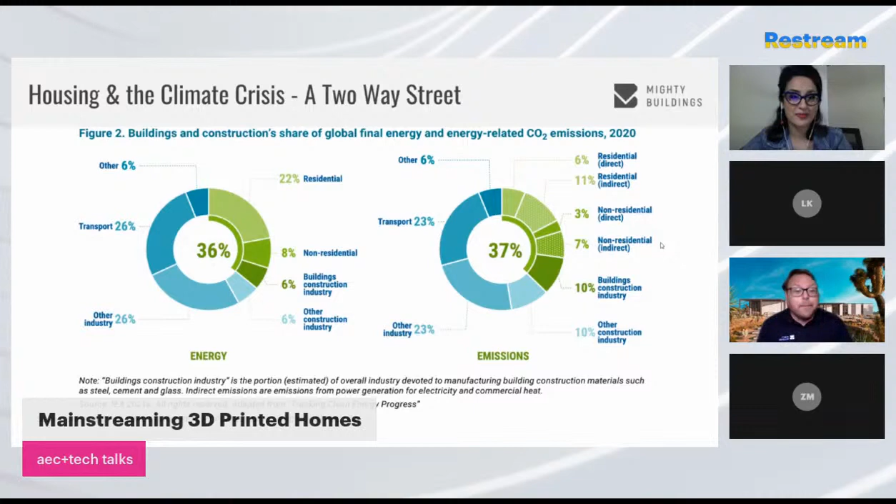3D printing offers new possibilities in changing how we build by bringing in new materials, new technologies, and by inherently being a zero waste production process. So we're starting to see a rise of it across the world.

We've had ICON building developments in Texas and Mexico for low-income housing. Apis Cor has done some office buildings in Dubai. We've got SQ4D listing a home on Zillow. We've got Branch Technologies doing really interesting work with non-concrete 3D printing for insulated facades and other work. And then the great work that Alquist and Black Buffalo have been doing with Habitat for Humanity to really unlock productivity and bring affordability into it.

So there's a lot of opportunities, but at the same time this is also the building sector, and it's a heavily regulated marketplace. So it's really important that new standards are brought into play, because all too often building codes are sadly written in blood, and they don't actually get modified and updated until something has gone wrong.

As part of this, we've been working closely with UL, Underwriters Laboratories, to develop UL 3401, the world's first standard for 3D printing construction, which has been added as an adoptable appendix to the International Residential Code. Additionally, the International Code Council, ICC, developed acceptance criteria 509, originally in partnership with Contour Crafting, but more recently updated for multi-story printing in partnership with Black Buffalo. That one's really focused on concrete 3D printing.

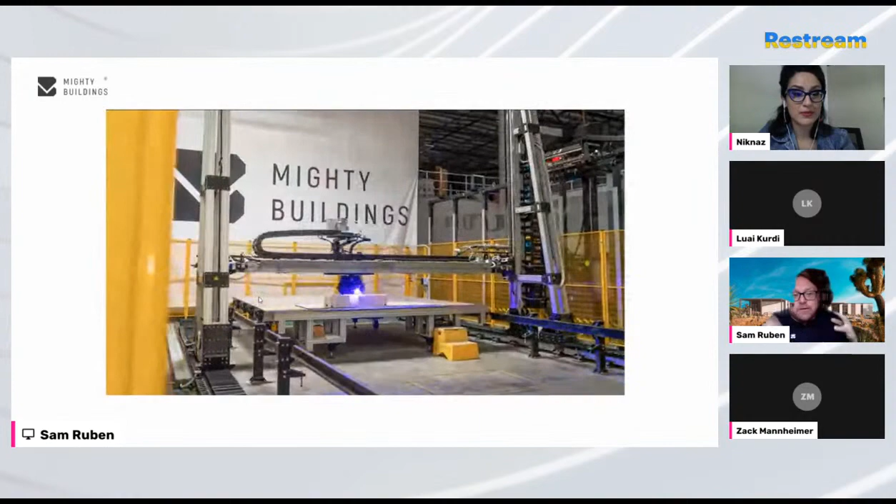So what you're seeing here is the Mighty Buildings printing system, which, as you can see, we are able to deposit the material like a standard extrusion method, but then hit it with UV light as it's coming out, which triggers the curing process instantaneously.

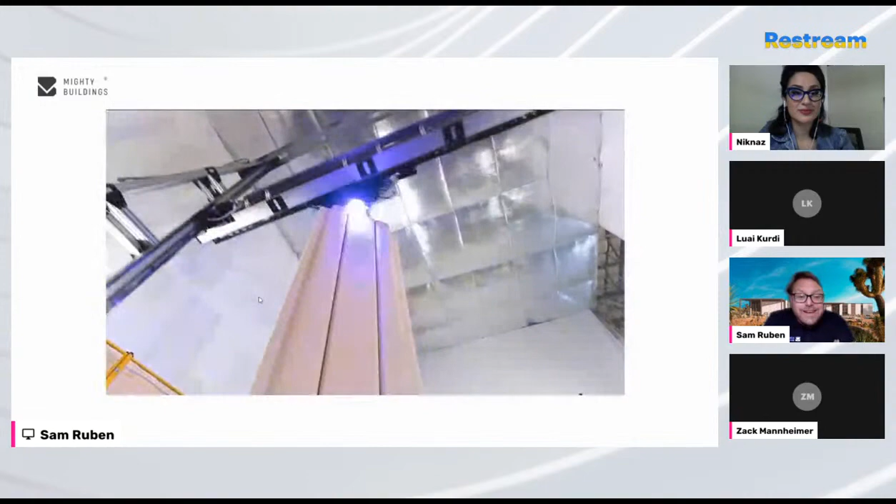And as I mentioned, we have the ability to deposit fiberglass reinforcement into the print layers as we're printing, which makes it incredibly strong and allows us to create unique shapes and forms just by changing the file.

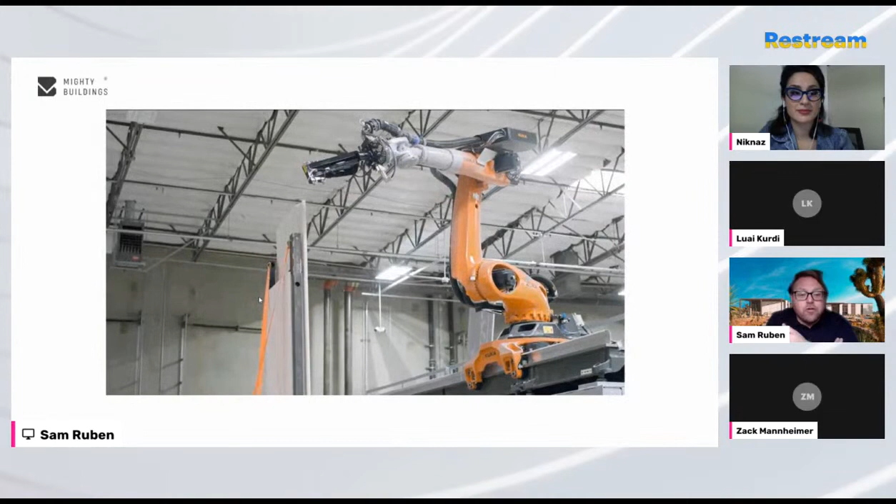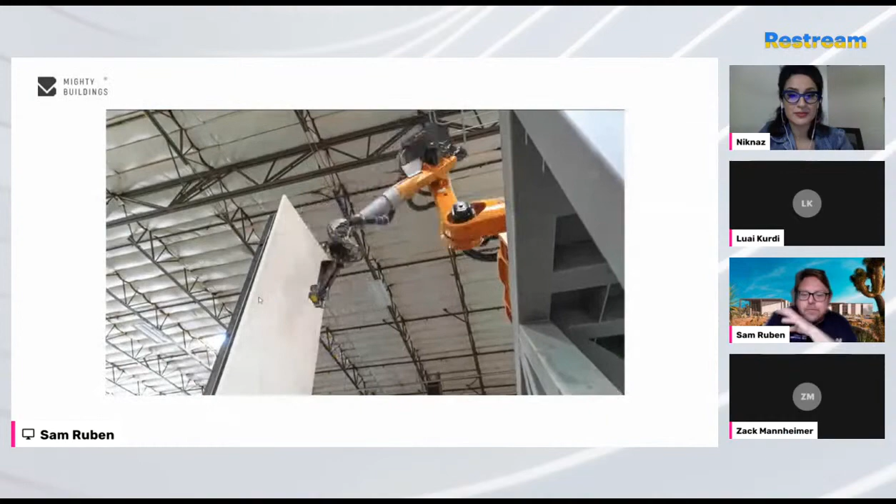And once it's done printing, it then goes to our post-processing cell, where we're able to scan it with laser scanners to ensure it matches the digital file it's based off of, but then also to create a digital model of the physical object itself to allow us to mill it with tools, because even though our material is really strong, it's still soft enough that it can be milled using CNC heads normally used for wood.

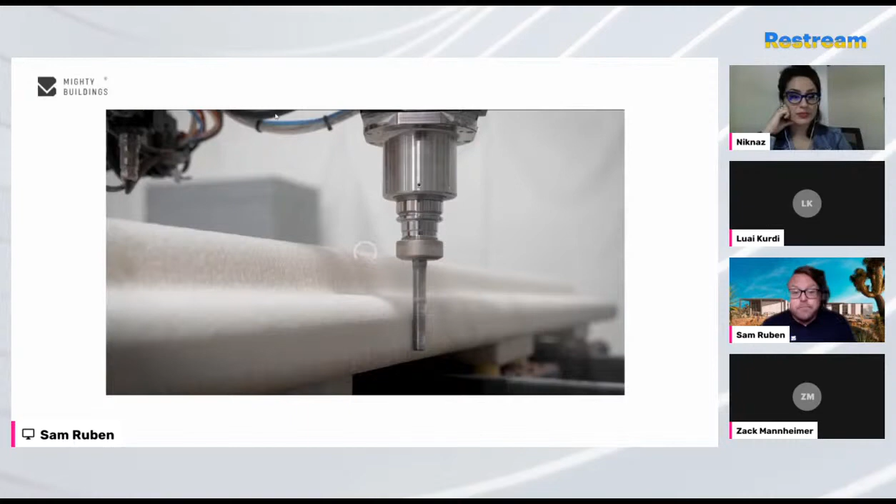So what this means is that it allows us to leverage that to create exact tolerances for on-site assembly, as well as allowing us to introduce new shapes and forms on the surface. So we can leave it with the raw print, or we can mill it to a smooth stone-like finish. And we haven't done this yet, but there's no reason we couldn't leverage that to make it look like brickwork or siding.

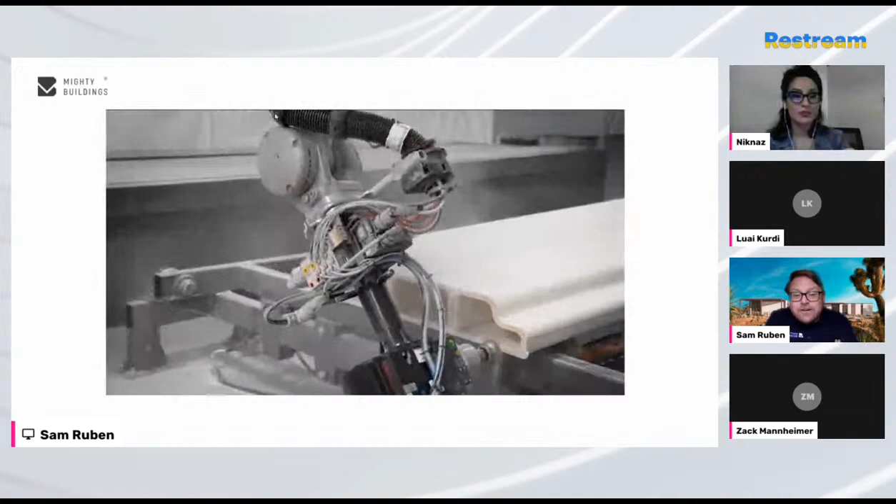Additionally, we have developed the ability to automate the pouring of foam insulation into the interior of each cavity, and that adds to the energy efficiency, which allows us to deploy zero net energy homes. We're also developing the ability to automate spray coatings, so paints, primers, stuccos, that further add to the aesthetic versatility of our production process.

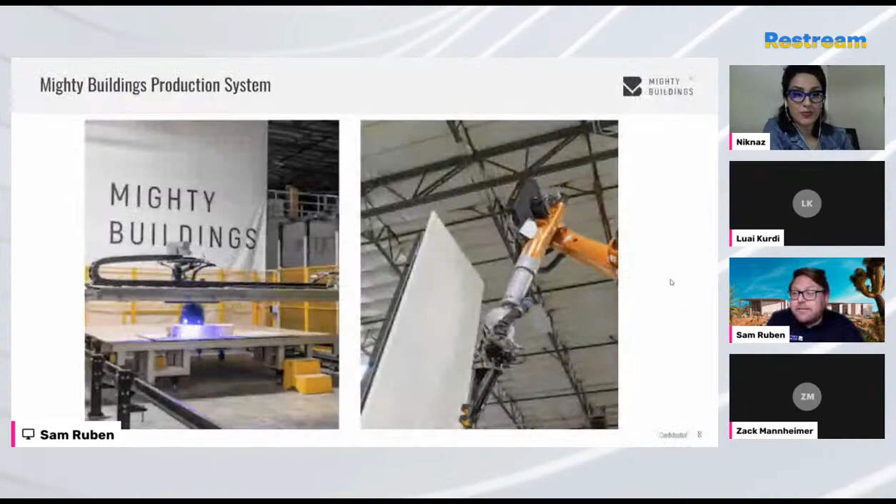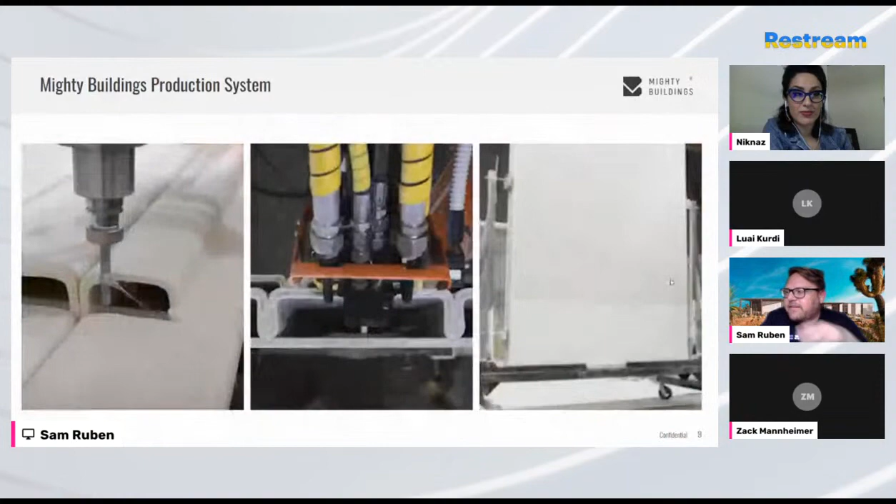And so, in case the video was a little choppy there, these give you a sense of the printing and the scanning that we're able to do. And then this gives you a sense of the actual pouring of it.

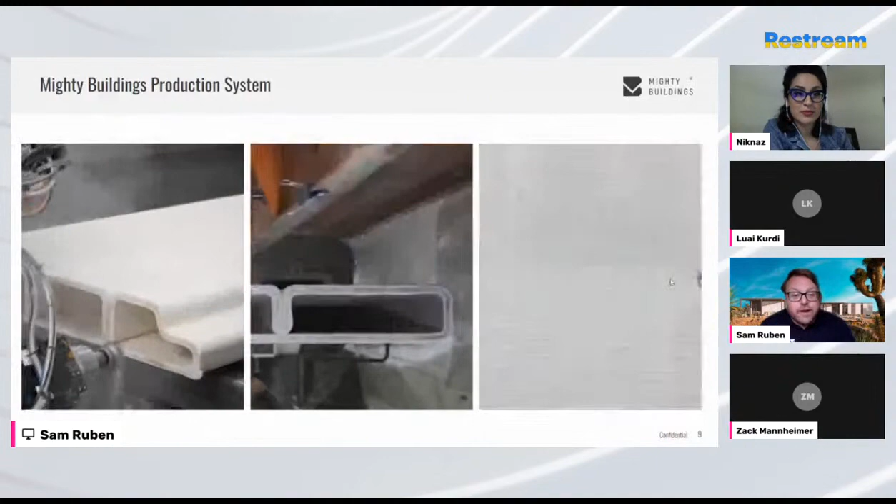One of the things that's really cool is that normally when you're using a high density spray foam like this, you have to have a press in order to ensure that the material doesn't break from the internal pressure. Because of the strength of our material, we don't need to. We're actually able to inject that foam and allow it to expand without any issues. So that's one of the things that we're really, really excited about.

Additionally, with the fiber reinforcement, we're able to fully impregnate it, so it becomes a continuous part of the material. And because it's a continuous fiber, it adds significant tensile and flexural strength, which is particularly important for markets like California, which are faced with lots of seismic activity.

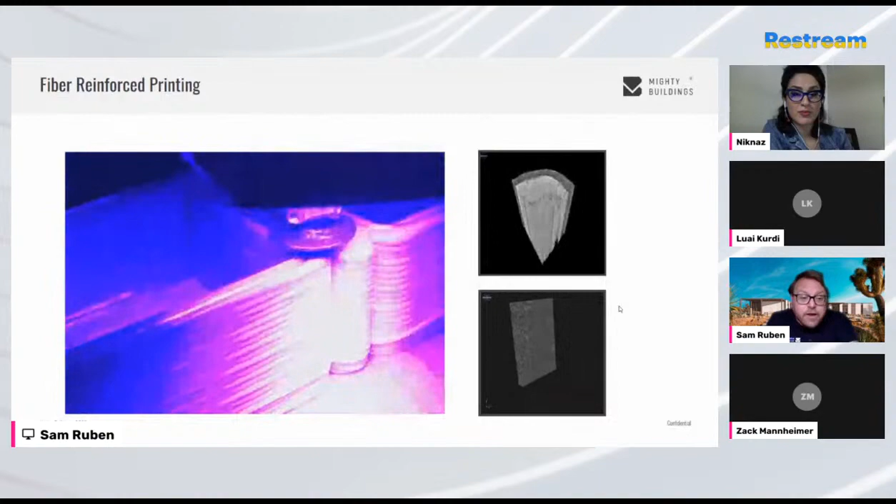It also is important for markets that we're moving into, such as the Caribbean and Florida, where we need to be able to address significant wind speeds, up to 190 miles per hour or more, in order to be resilient in the face of hurricanes and other significant severe weather that we're seeing more and more of.

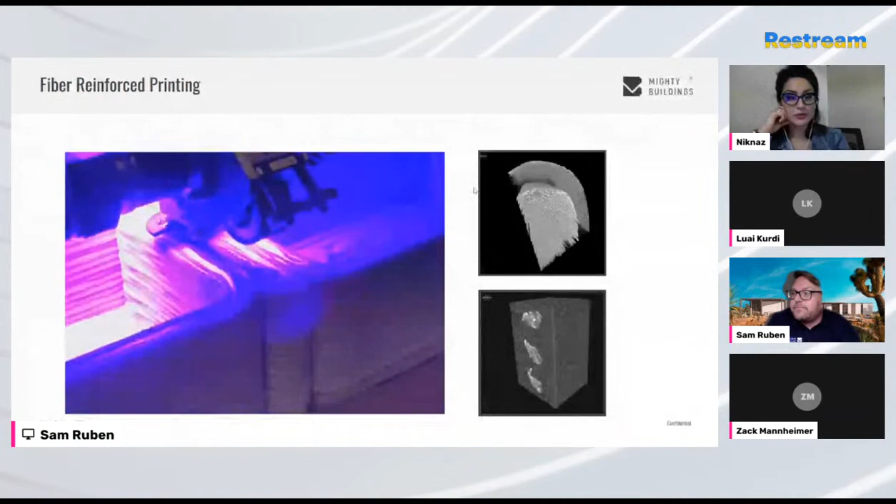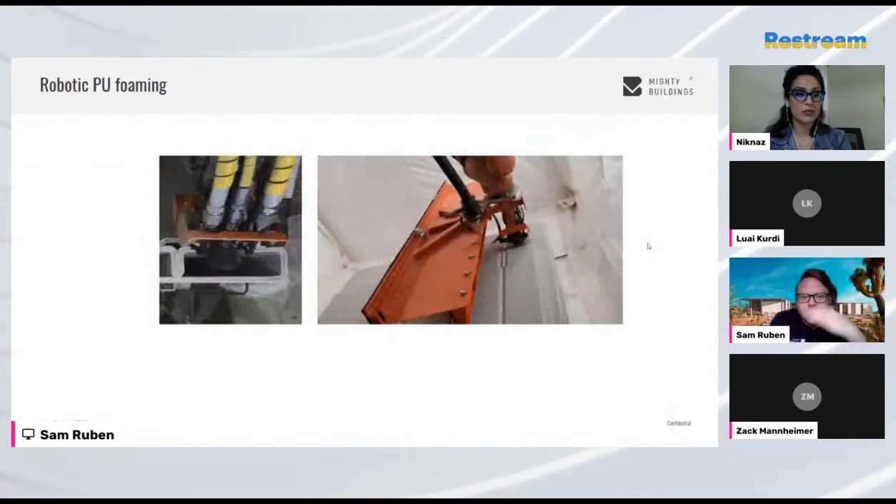Also, we're able to optimize the structural capacity and are working on moving from the single-story homes that we've been deploying into multi-story single family, as well as multifamily townhouses and eventually low-rise apartment buildings. So really looking to expand the typologies possible with 3D printing in order to meet the needs of various communities, and to do both new developments as well as opportunities for suburban and urban infill.

And so in terms of sustainability, one of the things that we've done is that we've committed to being carbon neutral by 2028 without the use of purchasing offsets. And so that's something we're actively moving towards as we move down our roadmap.

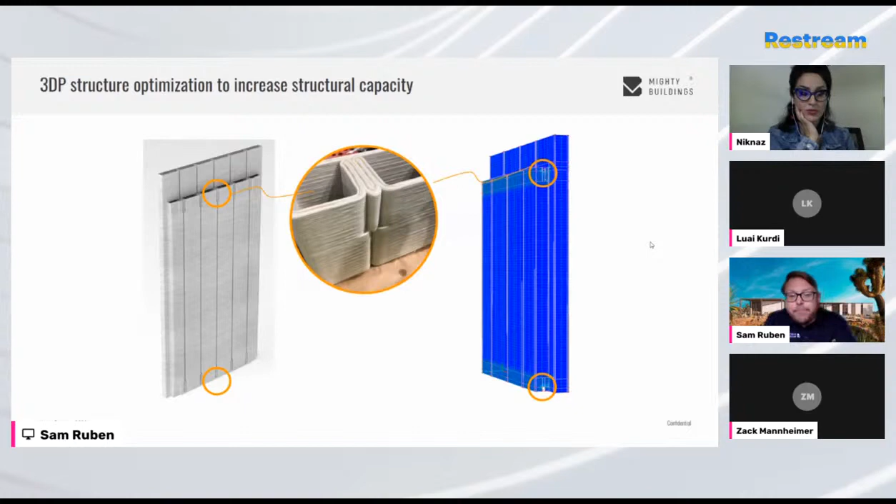Also, one of the exciting things about the 3D printing is the ability to do parametric designs and new possibilities and new forms and shapes, and really unlock what a house can look like and unlock the creativity of architects.

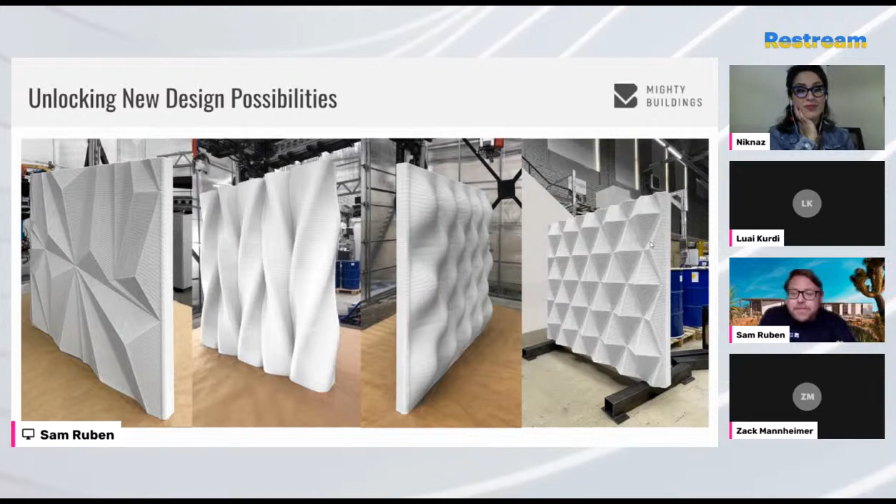And when we think about sustainability, we're looking both at the operational carbon, which is one of the key aspects of a new development we recently broke ground on in Southern California, the world's first 3D printed zero net energy community. We're doing it in partnership with the Palari Group, designed by EYRC Architects and engineered by Buro Happold Engineering, and it will incorporate the Delos Darwin healthy home system, as well as on-site rooftop solar and battery storage.

Additionally, when we look at our units and our material, we're looking at the entire life cycle, so we're really looking to expand what's possible, including end of life. Currently, we're able to recycle and grind our material up and add it as filler in new material, up to between 5 to 10%.

But as we're actively moving down our embodied carbon roadmap to achieve carbon neutrality and then move into carbon negativity, we're actively exploring true circularity, both in terms of recycling our material back into a printable form, so product level circularity, and also systems level circularity or industrial ecology — the ability to take waste streams from other processes and use those as inputs for our material, something we're already doing with recycled glass and other recycled content, as well as the ability to break our material down at end of life into components that can be inputs into other industrial processes.

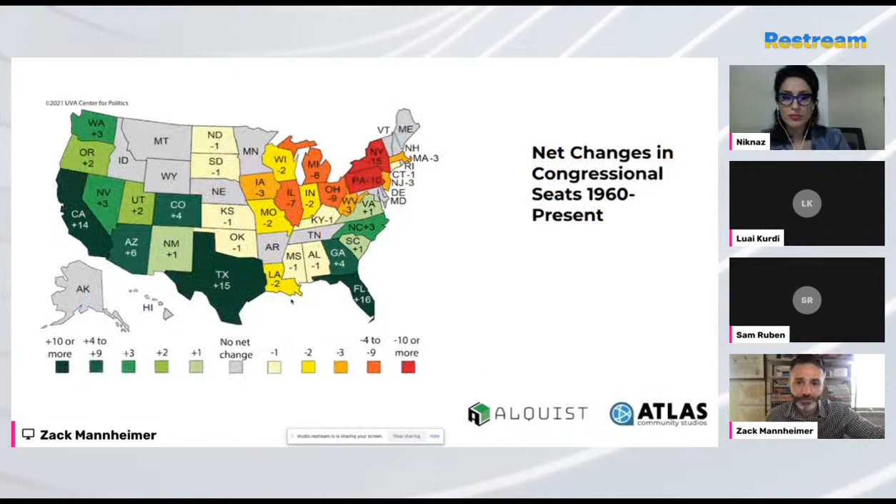This is nothing new. For the past 50 years, the coasts of our country have been oversaturated and people have been leaving. This map really illustrates the rural loss over the last several decades. It's been really dramatic for where they've been going. And our congressional map shows it: people are leaving the Northeast, they're going south and they're going west.

Here's a map of where they went between 2000 and 2007. They largely went to what we call second cities: Minneapolis, Kansas City, Nashville, Austin, Denver, Miami, New Orleans, Atlanta, Phoenix. Those are the cities that gained population at almost identical rates as a place like San Francisco did per capita 100 years ago. Very similar patterns.

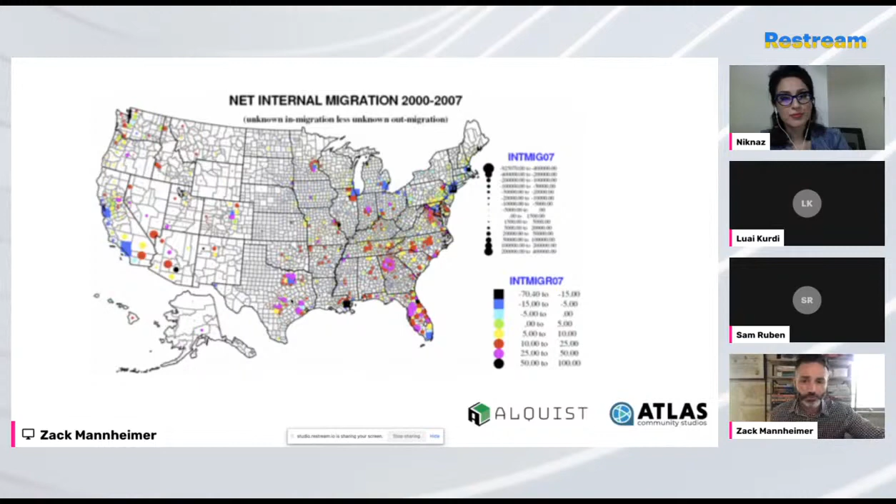We used to say before the pandemic, by about 2030, those second cities would be oversaturated. That's where we're seeing the rise of now: places like Des Moines, Iowa, Boise, Idaho, Albuquerque, New Mexico, Little Rock, Arkansas, Birmingham, Alabama, Madison, Wisconsin. These are the cities gaining population today. We used to say by 2030 that's when these third cities would be oversaturated, but everything has changed.

Remote work has been obviously a strong driver of why that's happening. I'm broadcasting this from my basement right now. I was remote working way before it was cool.

But what's happening now is there's this three-headed migration monster that's attacking the country. It's economic migration, which has been happening for decades. It's pandemic migration, and climate-based migration, because people don't want to be living around where there's significant storms all the time. So you add all these pieces up, and we believe there's about 15 million Americans looking for new places to live, work, and play.

And so the process has changed. We believe there's no more rhyme and reason for where people are going to go based on population and location. And we think that people are moving right now.

They're going to be deciding by about 2024 where they're going to locate. For the first time in human history, people don't have to be attached to a large major city to experience the best arts and culture, the best education, and the best business opportunities. You can do it anywhere, but that presupposes that your community has very strong broadband and a high quality home to live in. So those are the major issues we have to focus on.

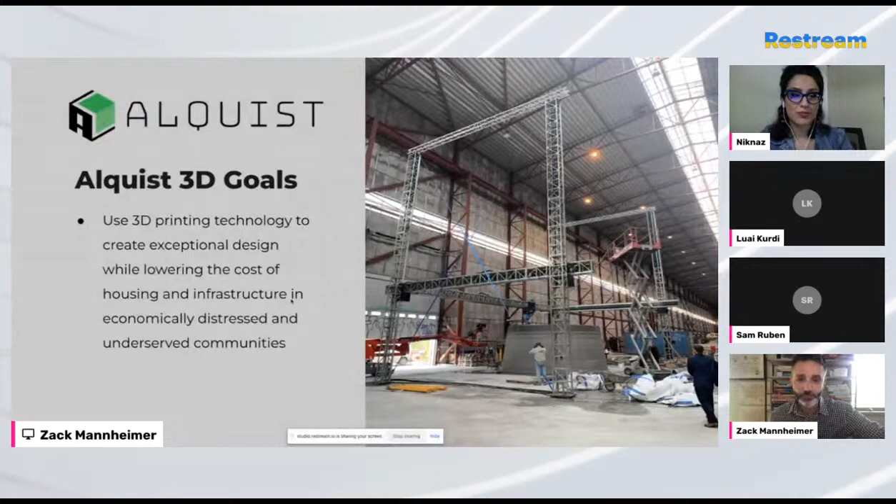We believe heavily in community. Each community we have will have its own very unique features that reflect the local culture. Affordability is a strong belief. We believe a house is a home well before it's an asset. We believe in sustainability, much like what Sam was talking about. We're working on many of the same concerns as well. And then technology, not just in the creation of the home itself, but far beyond, which I'll talk about in a moment.

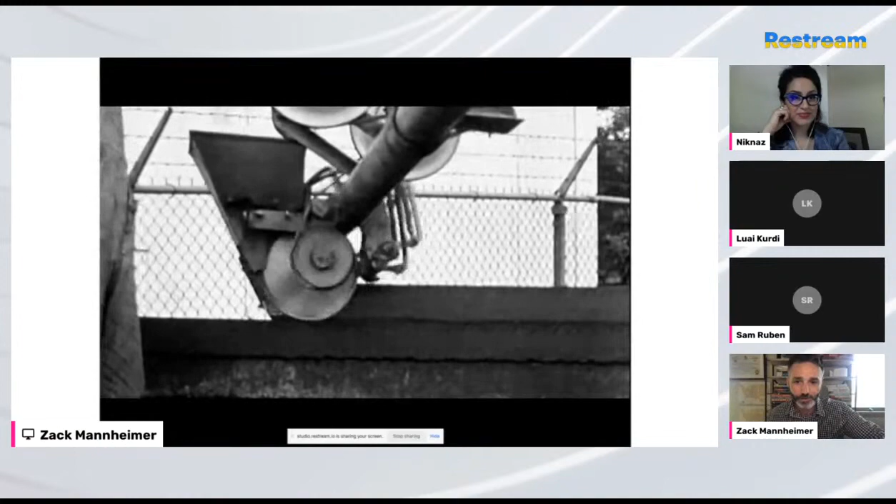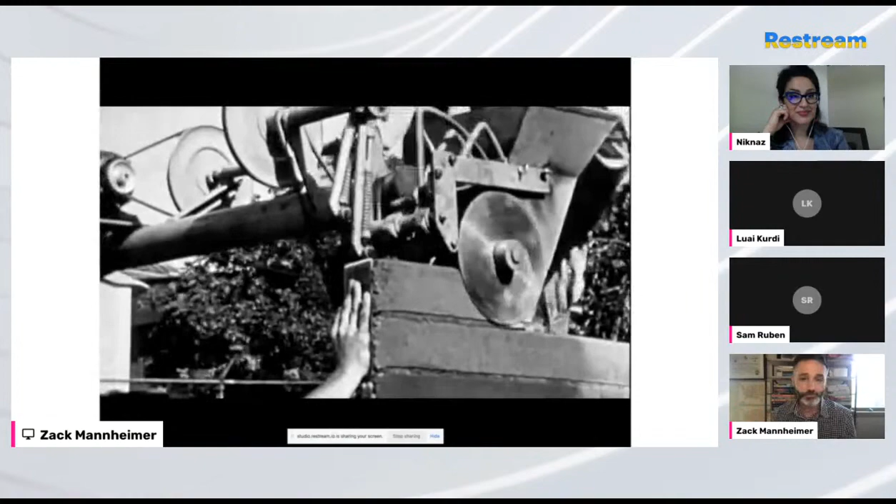Here's what's interesting: 3D printing is not necessarily new. This is footage from 1934 that we found of people using very similar technology that we use today to 3D print with concrete. Of course, we're not standing there on a scaffold dumping the material directly into the machine, and we can move much faster than this machine is moving. But the basic tenets of this are the same. If there's one thing we can learn from this video, we very much want to have the choreography that these guys have here at the end. We want to be able to do this at the conclusion of all of our homes, but we haven't quite achieved that just yet.

It is a 1,200 square foot, 3-bed, 2-bath, single-story slab-on-grade home. We 3D printed the exterior walls only. We smoothed the print, the concrete, as we printed it, so it has almost a stucco-like look. Then we gave it 2 coats of white paint, and that's about it. The rest of the home was built out traditionally the same way you would build any other home. On the inside, the homeowner chose to cover up the concrete with drywall, so you would never even know this home was 3D printed when you go inside. We don't always do that. You can certainly leave the concrete bare, which of course saves cost, but you can also put up the drywall like April decided to do.

It's a beautiful day. We couldn't have done any better. I know, again, we must be good luck.

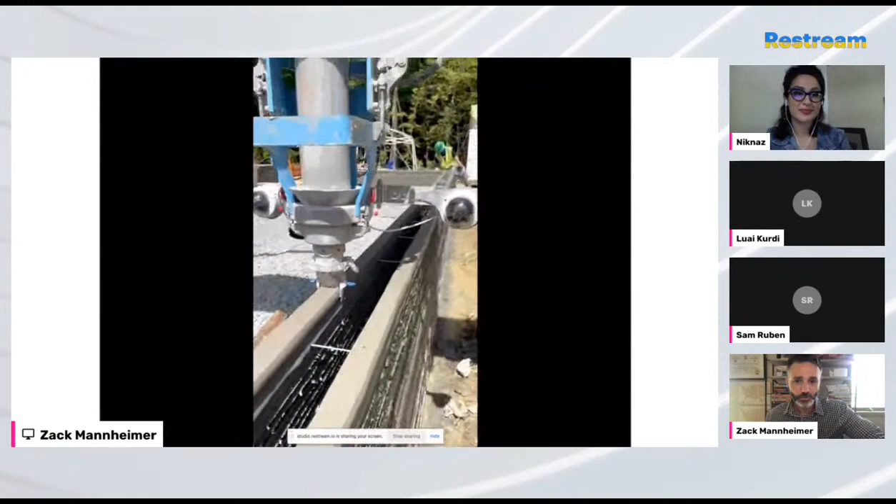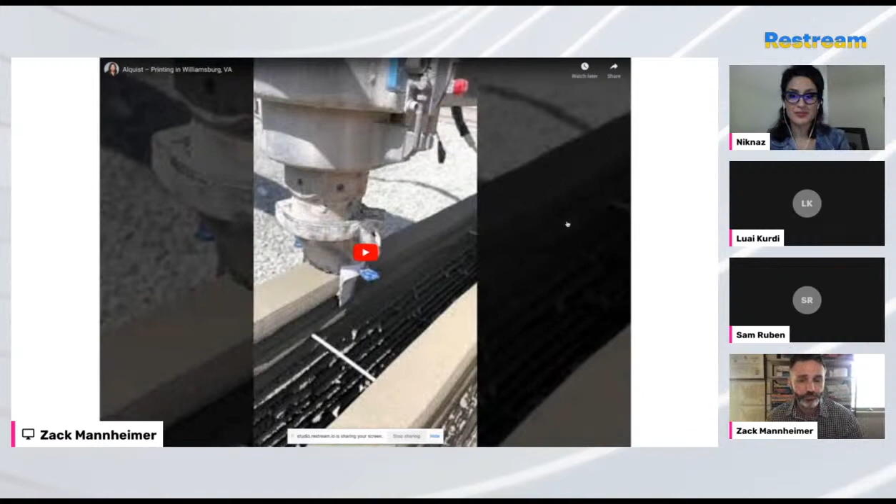So what you're seeing here are the exterior walls being printed. We print two lines on the exterior, roughly two inches wide, with a four-inch gap. Inside that gap is where we insulate, very similar to what Sam was showing. We do add some steel ladders every 10 to 12 layers for reinforcement.

So, some facts about the Williamsburg home. It took us 22 hours to 3D print the exterior walls. That was over a week and a half due to weather issues, and we keep getting better at that. It's estimated that the savings were about 10 to 15% per square foot. Normally, it would have taken Habitat anywhere from 2 more weeks to frame out the home than it did for us.

The home is Earthcraft certified. We put Raspberry Pi sensor systems inside every wall to prevent damage, and also to serve as your security system for the home and your air quality system as well.

This home will be outfitted with a solar panel, a battery, and an EV charger so that we can hit carbon net zero as we move forward. That home was printed using a COBOD BOD2 printer.

We have a new printer from Black Buffalo, our new partner that we're working with. This is that printer here. This printer is capable of going up 3 stories.

We have not done that yet. We've only gone up 1 story. And it's on a track system, so we can lay multiple tracks and print multiple homes at a time.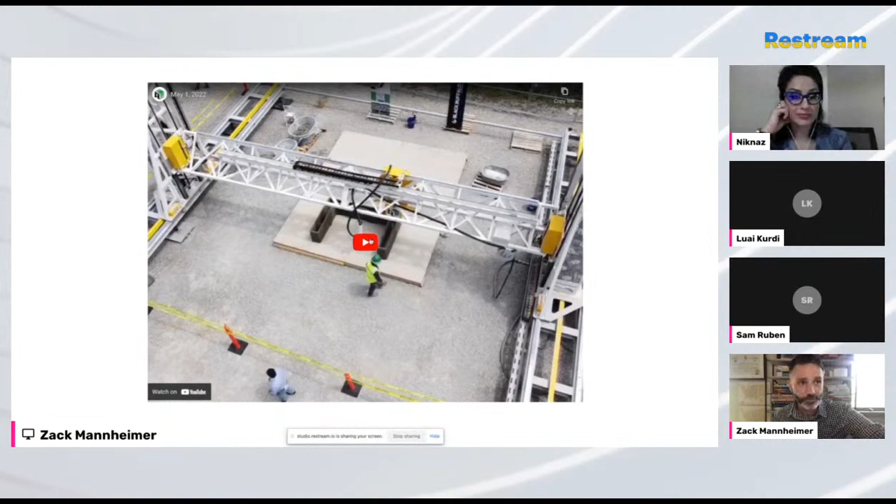So this is a prototype print that we did about 3 weeks ago in Pulaski, Virginia. We're not smoothing the concrete here. We were able to get really beautiful lines, which is what we wanted to hit with this printer.

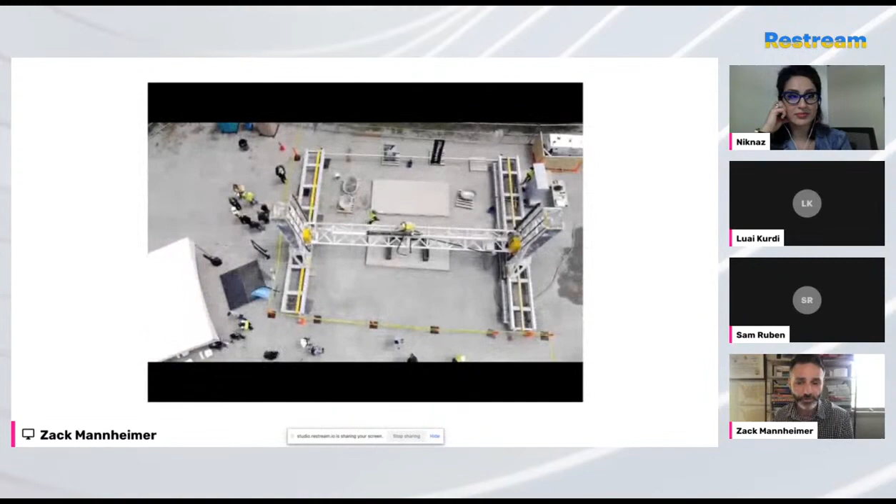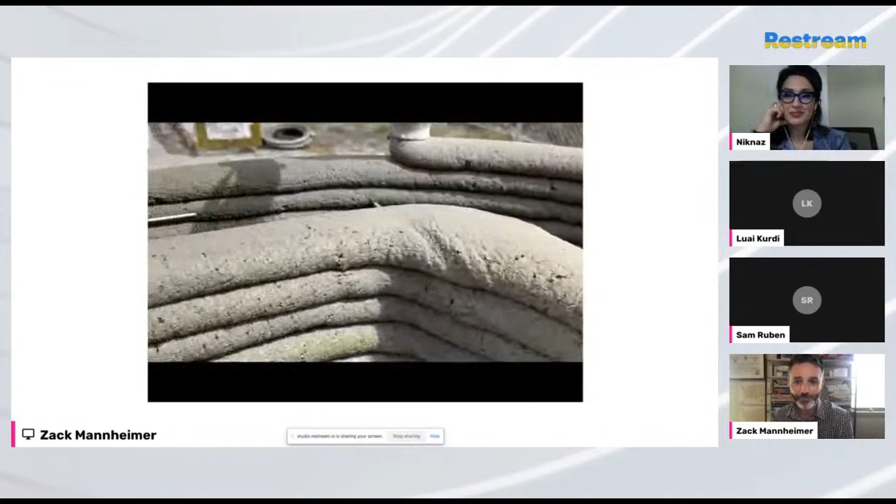You can see the footprint and the size of this thing. It doesn't even have the 2 extensions on top to go 3 stories, but it is a beast. We love it. And Black Buffalo is working on even newer printers that are smaller and easier to set up and break down, coming out later this summer.

So here's a couple advantages about 3D printing that we know. First of all, your cost savings come in time — we can reduce the home framing by about 2 to 4 weeks. For labor, you only need 2 humans to operate the printer.

We're not there yet today — we're still using 4 to 5 people. We're going to be getting down to 2 over the next 2 years. Part of the problem is there's no training system or program nationally that teaches people how to do that, which I'll come back to. And the material cost is far less than lumber today. When you add all that up, you get about 5 to 10% savings today.

We believe we can get up to 30% over the next 2 years as we continue to gain experience. We also know that a 3D concrete home, even before you put a solar panel or other alternative energy on there, uses 50% less energy than a traditional home. So you're cutting your utility bill in half right off the bat.

We have 80% less waste on site. The design flexibility is stronger. We believe these homes will last up to 175 years. And then the durability of the homes, which still needs a little bit more research — we're really excited that Sam's doing that and other groups are as well. But we believe these homes can survive tornadoes, hurricanes, flooding, fire, and seismic shifts in the locations where we'll be.

And it's really important to note that the only difference between one of our homes and a traditional stick-built home is that our exterior walls are built out of concrete instead of wood. That's it. The rest of the home is still built exactly the same as any other traditional home, utilizing electricians and plumbers, etc. And so we're able to pass all state codes wherever we're printing.

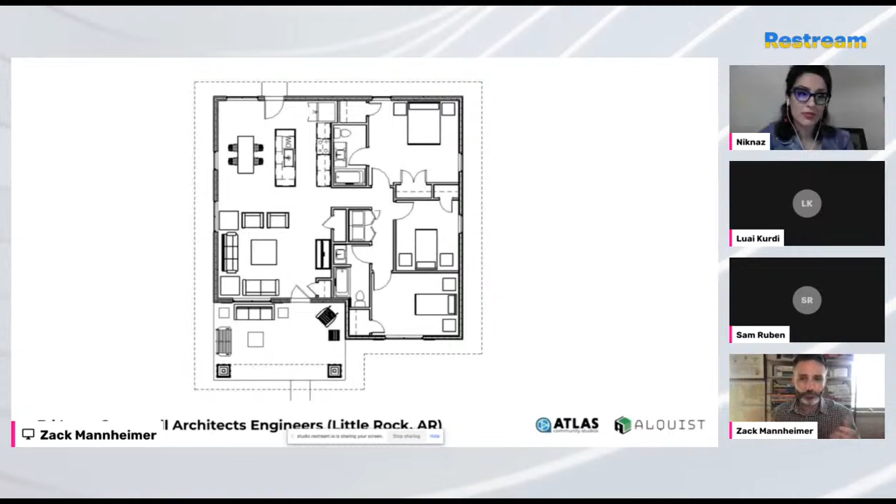So it's important also to note that when you think about a 3D concrete home, your mind conjures up all sorts of shapes and sizes and futuristic images. And certainly we can do that — we've got lots of those designs.

For the first homes, we wanted to make sure these look like home, like any other home that would fit into the neighborhood we're going into. So we came up with a very traditional floor plan to be part of that.

The way the process works, you use BIM software to design it. That goes into your surface modeling and into the software that talks to the printer itself. We mix all of our concrete on site. It's pumped through a hose and it lays out the walls layer after layer.

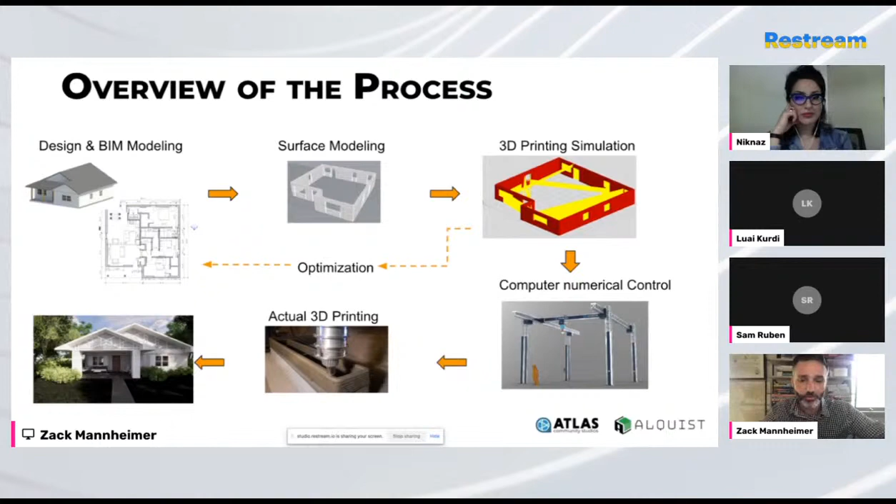We received lots of great press for this work all over the world. It was pretty phenomenal and overwhelming how many folks contacted us about it, which is really exciting.

I want to take a moment and talk about why we're called Alquist. My background is in theater, so it makes total sense that now I run a construction company. Alquist is a character from a 1920 Czechoslovakian play called RUR that many folks haven't heard of before. RUR is the first piece of literature that ever coined the term robot. This is where the word robot comes from.

The plot of the show is similar to any other science fiction book or movie you've read or seen. Man invents robot to speed up manufacturing. Robots learn about their surroundings. They don't like how they're being treated and they revolt and kill all the humans. Spoiler alert. But there's one character named Alquist, a lead engineer who believes robots and humans can coexist peacefully, and he is spared by the robots and charged with rebooting the human race.

So that's the play. But we're named Alquist after that character to remind us that, yes, we are using automation to replace human jobs with robots. There's no way around it. We have to own that.

So we have a robust workforce development program we're working on with Virginia Tech through a HUD grant. We're going to be offering a certificate program in 3D CP training starting next year at community colleges and high schools everywhere we're going to be printing. It should be a 6 to 8 week course, 3 to 4 weeks in the classroom, 3 to 4 weeks in the field, and anybody can be certified in how to become a 3D concrete printer.

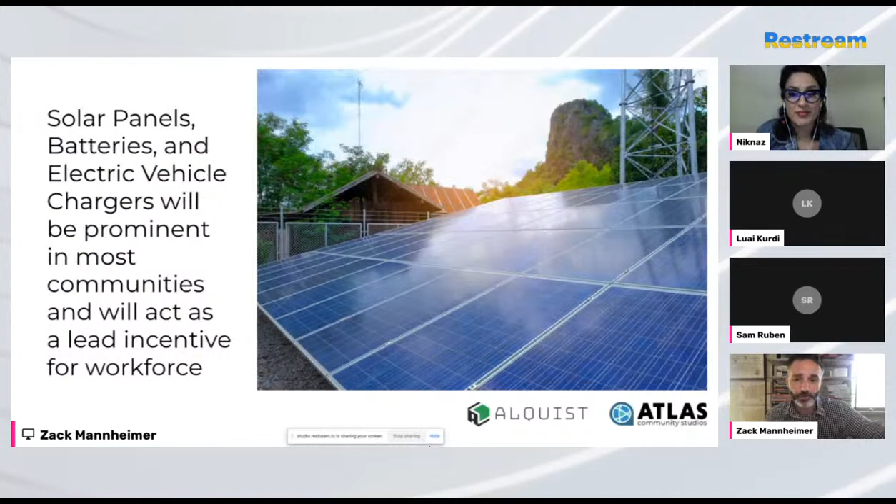That's all beginning to change. We can go anywhere if we have the right broadband and housing. We believe that 3D printing is going to make housing much easier and more affordable. We also believe in blending the worlds of printing prefabricated units like Sam is doing in a factory, and printing on site. We think those two worlds are going to get married here in the next couple of years. We believe alternative energy is going to run its course and be everywhere throughout rural America coming soon.

And we also think that there's a new approach to home design, renovation, and repair. Every Alquist home that we print and sell will come with your own personal 3D printer built into your kitchen, just like a microwave. We're doing this, one, to help stand up the industry, but two, we think this is where things are going in the future.

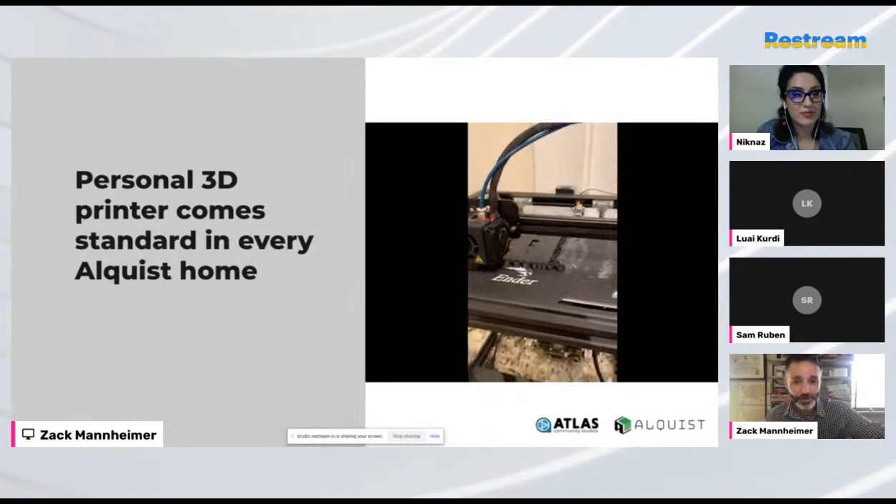If you want to change anything inside the home, we want to be able to 3D print everything inside your home out of multiple materials, not just concrete. What you see the printer printing here is a light switch cover. This cost 17 cents to do. It took about 40 minutes to print. In the future, if something breaks or you want to change the look of something, you're not going to go to the hardware store. You're going to go online, download a file, and print it out yourself. We want to be at the forefront of this new technology.

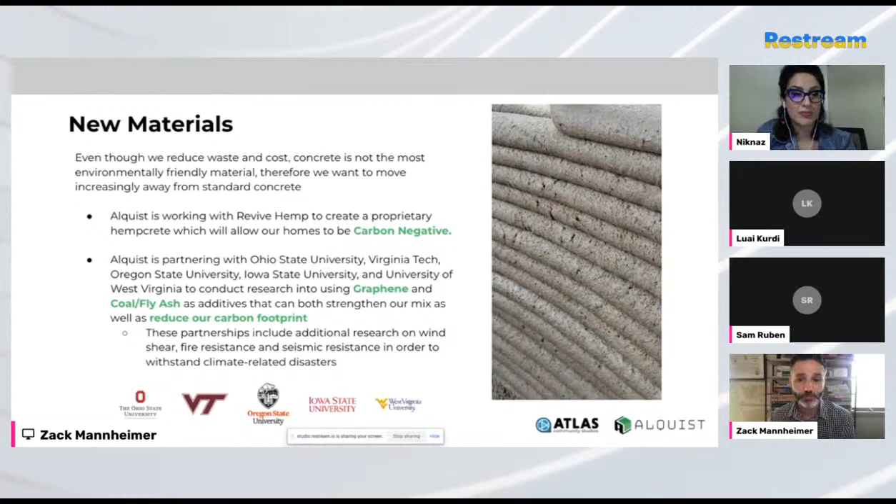We're also looking at using new materials, just like Sam is. We want to use recycled glass and plastic in our materials. We want to get into hempcrete - we're beginning that research right now. We just wrote an interesting grant in Appalachia to study whether we can use coal fly ash in our material. We don't know what the environmental impact of that will be yet, so we're beginning that work now with our university partners to figure that out.

15 million Americans are on the move by 2023 and 2024. If your community needs to grow, now is the time to wave your hands in the air and say people need to come to you, but it means you must have the right housing and broadband to support it. These are just a handful of the communities I've been to in the last year. And if there's any great unifier that I can offer, it's that whether you're in rural New Hampshire, rural Arizona, or rural Kansas, we all have the same problems. Housing is the number one issue everywhere that we're going, and that is a great unifier.

I want to close with this quote from one of my mentors, Richard Florida, who says: 'The remote work revolution promises to change the way that Americans work and live. It will allow smaller cities, suburbs, and rural areas to compete with the superstar cities on the basis of price and amenities. It will shift the main thrust of economic development from paying incentives to big employers to investing in building up a community's quality of life. As communities attract more remote workers, their tax bases will grow, allowing them to improve schools and public services, benefiting everyone. Eventually, companies will come too. That holds out the possibility of a better, virtuous circle of economic development.' I could not agree more. This is exactly what our mission is. Thank you so much for your time today. It's an honor to be with my colleagues here.

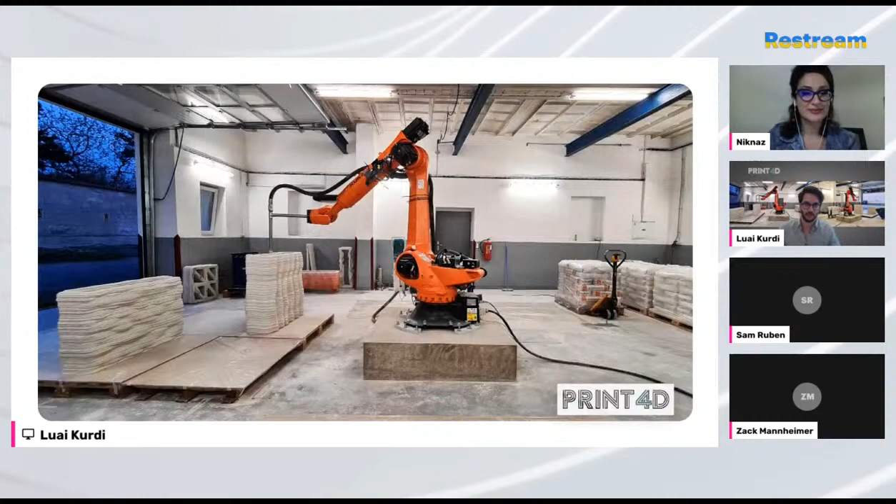Our technology relies on robotic-arm 3D concrete printing, where we are focused on prefabrication and off-site manufacturing for houses and other applications in the concrete industry. I have this case study to share with you, which is actually the first fully structural load-bearing building in the UAE, where we did not use any steel reinforcement.

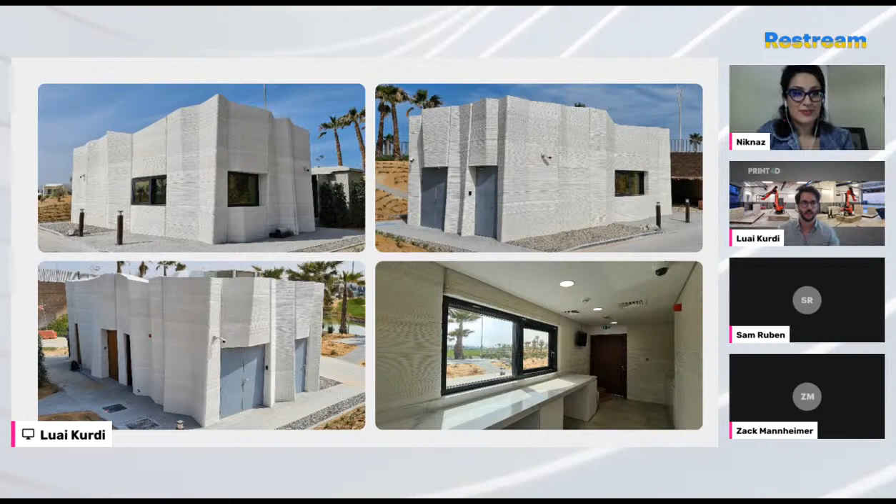This project is located in Abu Dhabi, and it was constructed around 1.5 years. As I mentioned, it's a prefabricated offsite construction methodology, and I was very fortunate to be the architect leading this design and project, and also the 3D concrete printing expert who printed the project. Having the background in architecture and construction, I really tried to figure out the small details and the challenges and try to innovate on them in this project, and I will be sharing more with you during the presentation.

With this technology, if you want to design these really complex, double-curved, interesting organic geometries, you don't have to use any molds. Then you are saving a lot in terms of the material, because you don't have waste material. And also in terms of lead time, you basically take it from your 3D software into the printer and you start printing, so there is no real gap between that process.

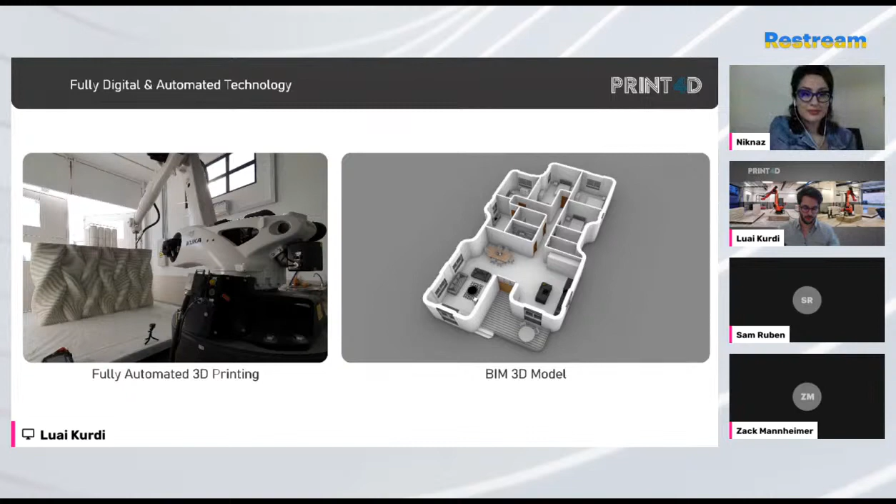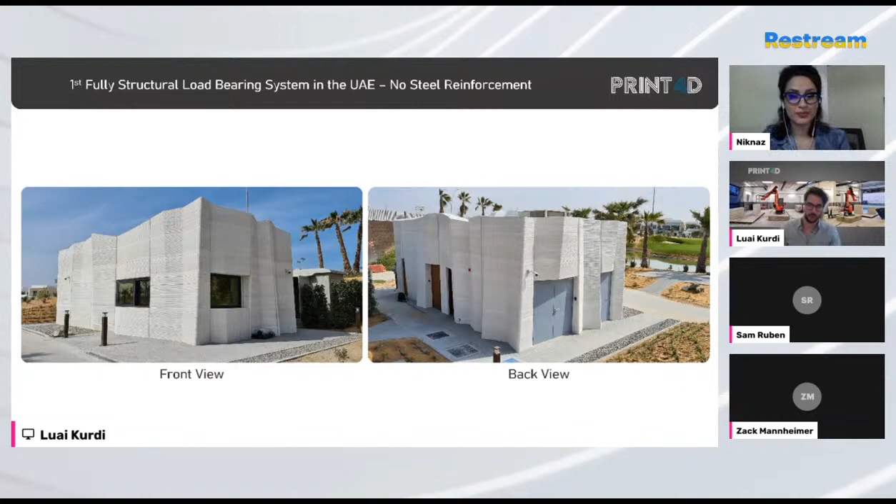Going to the architecture, the features and solutions that we worked on in this project: this is a fully structural load-bearing system. It means that all of the walls, the 3D concrete printed material itself, is carrying the load of the roof. So we don't have any steel inside, and we don't have any traditional columns inside, which means this is a more classical approach to construction. You can see here both the front view and the back view.

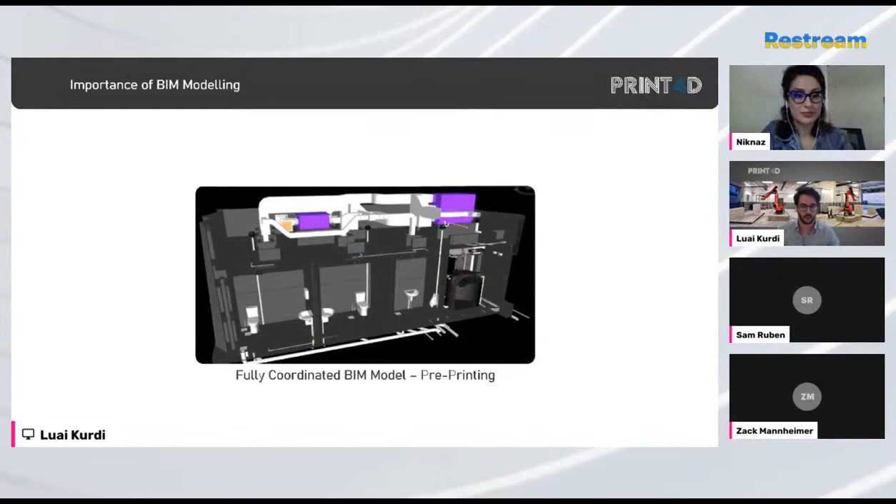This is what I mentioned earlier about the fully coordinated BIM model. Here you can see that we had all of the fixtures — sanitary, mechanical, electrical, plumbing, piping, electricity — all fully coordinated and modeled in 3D before we even started printing. Once we knew that everything works seamlessly together, we went ahead and started printing.

And what this opens up for in terms of architecture and construction is a new way of building. We are printing fully printed building blocks.

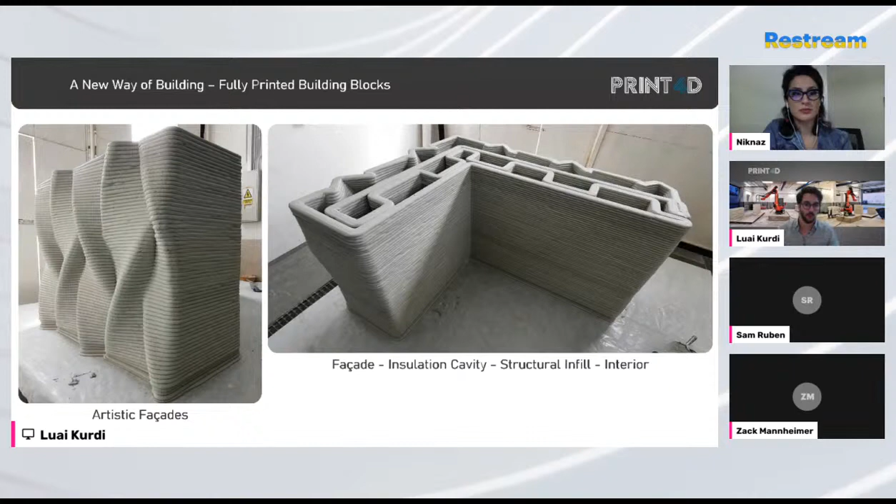With this technology, you're able to print all of these components at the same time and ship them for final assembly, compared to traditional manufacturing where you need to assemble one piece on top of the other—the insulation on the wall, then the facade on the insulation, then finish the interior wall. But here, you do all of that in one go, and that's the real speed and innovation this technology offers.

Some of the architectural challenges for this project—there are a lot, but because we're limited on time, I'll only mention a few. As the architect designing this building, I really wanted a neat and clean vertical joint throughout the whole building to make it look nice and minimal.

On the left-hand side, you see Project Milestone, printed in the Netherlands, which used a more traditional solution for the lintel. For those who don't know, the lintel is the structural component on top of the opening. Here you can see the main door opening—it has the lintel on top, sitting on both sides on columns. That's how it's structurally supported.

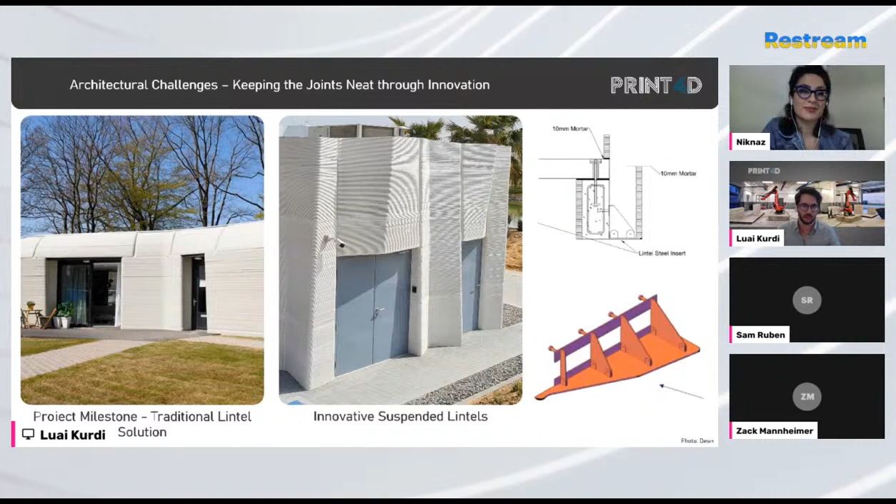But we didn't want to do that. We didn't want to take the easy way—we wanted to innovate and introduce a new way of architecture. So the solution we came up with was to suspend the lintel on the roof structure, and this is what we actually did. If you look at the detail on the top right, you can see the lintel is suspended—basically flying in the air without support from the bottom. This is one of the innovations, and of course the technology allows for it.

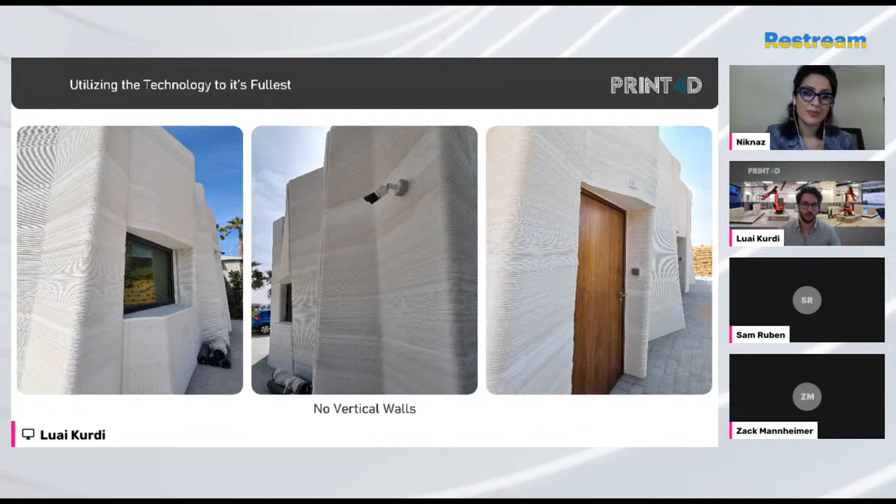In addition, through the design I tried to fully utilize the technology's advantages, so I made sure there are no vertical walls on the exterior. If you look at the photos, all of the exterior facades are inclined at different angles. This has a nice effect with the sun changing during the day, the reflection of light and textures changing, but it also brings the new type of architecture I was talking about before.

In terms of speed for this project, it took us 3 weeks to print offsite in a 3D printing factory, and 4 weeks to do the assembly on site and final finishing. We did not need to do any additional plastering or finishing. The work on site and the work off site took place in parallel.

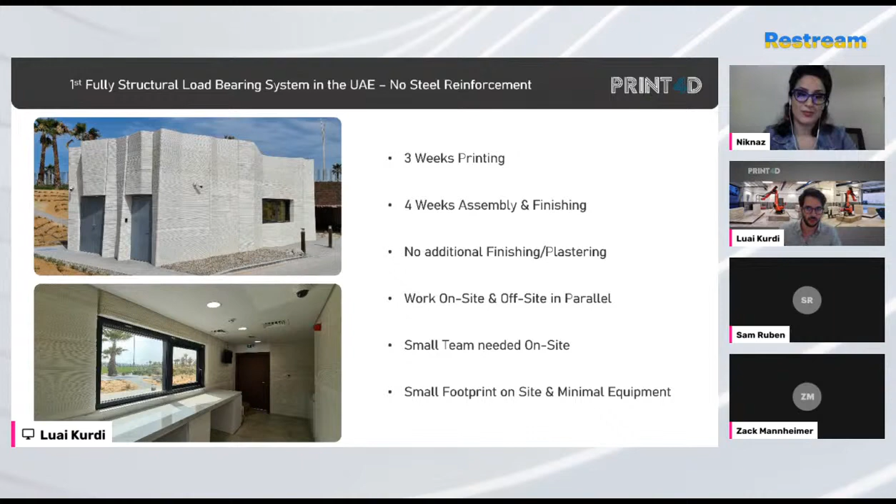This means we can really accelerate on both ends without one affecting the other. We had a very small team on site during installation, and also a small footprint—basically just a mobile crane and a storage site where we stored the printed modules, then assembled them one by one.

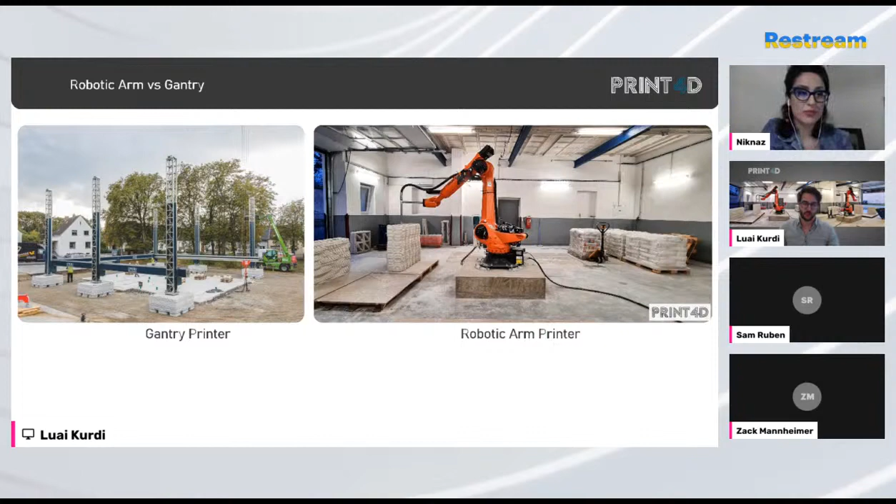So I'm going to talk about robotic arm versus gantry. The reason I chose this topic is I get a lot of questions like, why robotic arm, why gantry, and so on. Obviously I work with robotic arm technology, so I have my own preference, but that doesn't mean I oppose the gantry system. I personally prefer the robotic arm and see many advantages I'll share in the next slides. For those not familiar with the terms, on the right-hand side you have the robotic arm printer, and on the left-hand side the gantry printer.

I will start talking about downtime. If we compare the downtime between the two technologies, with the gantry printer, you will need to transport the frames and foundations that you need to install on site. You're going to have to assemble them, do the calibration before you start printing, and after you finish and want to go to the next project, you'll need to disassemble the whole printer and start all over again. So there's a lot of time and labor invested in assembling, disassembly, and transportation.

Whereas with the robotic arm printer and offsite manufacturing technology, there is no downtime. Basically, your printer is fixed. It can work day and night, so we have much higher productivity.

In terms of printing quality, with the gantry system, the photo on the left is a house printed in Germany. Because you're printing outdoors, you don't really have control over environmental conditions. One day you can arrive and the temperature is 5 degrees Celsius, the other day it can be 10 degrees Celsius. This is a big headache for operating this technology, especially because the materials are usually sensitive to environmental conditions. You would also need a tent to cover the printer during rainy weather, which means more labor, time, and cost. It's also very difficult to print during cold winter and hot summer conditions because you don't have much control over material quality.

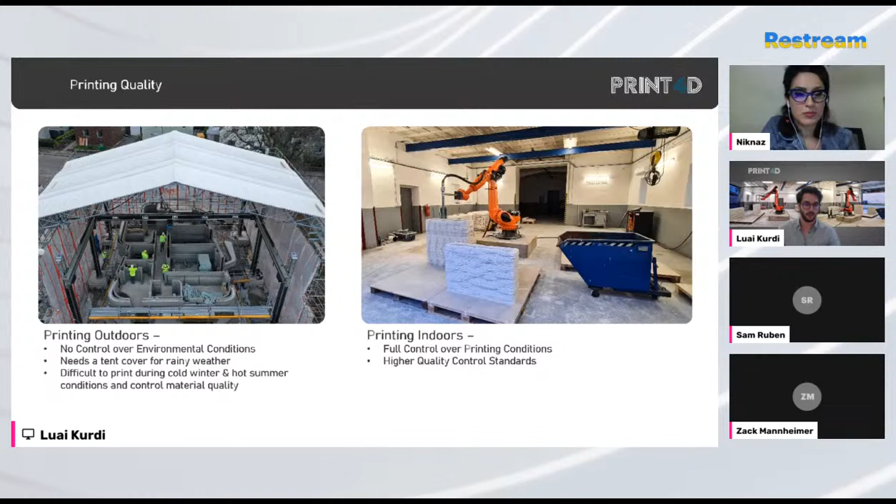Whereas with the robotic arm printing technology, because we are doing offsite manufacturing and printing indoors, we have full control over the printing conditions. So we can really fine-tune it to the right parameters, and because of that, we achieve higher quality control standards.

In terms of print quality and resolution, the gantry printer has other limitations, such as only being able to do simple vertical surfaces, because you're using thicker and higher layers. There's also a small turn radius for the print head, which is less accurate, because you have high vibrations due to the scale and weight of the printer's frame. So typically, doing strong turns is not the way the printer likes to go.

Because of this lower accuracy and print quality, you still need to do plastering, painting, and finishing — all the traditional steps that can otherwise be avoided. And if you have any failure during printing on site with the gantry printer, you can't simply remove that section and start printing again. It just doesn't work like that — you have to accumulate it on top of each other and try to finish it later once printing is done.

However, with the robotic arm printing on the right-hand side, you can see the quality. We're able to produce complex double-curved surfaces because our print accuracy is plus minus 0.05 millimeters — basically 100% accurate. And we can leave these beautiful layers as the final finish. We don't really need to leave them; it becomes a personal preference for our clients.

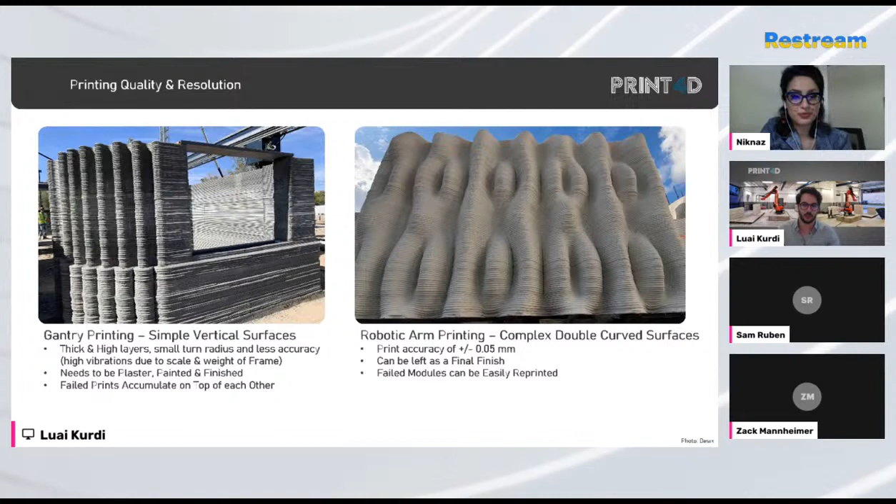And if you have a failed module, which often happens to us, you can easily reprint that piece — you don't need to reprint the whole project. Of course, by making these comparisons, I don't mean to say the gantry technology isn't good or doesn't have advantages. It does, in certain categories, applications, and weather conditions. If you find the right city with quite stable environmental conditions throughout the year, maybe it would make sense, but in fluctuating weather, it's quite difficult.

In terms of 3D concrete printing versus traditional methods, let's talk about price. Because it's a proprietary mix, 3D concrete printing material is 6 to 8 times more expensive than traditional concrete, which is one of the factors holding the technology back — that's why some printed projects still aren't competitive enough with traditional methods. But on the other hand, we have exciting new developments, as shown in the photos on the right, printed by Tolke-HSH in Germany, where they're basically using normal concrete straight from the truck to print — a really nice advancement.

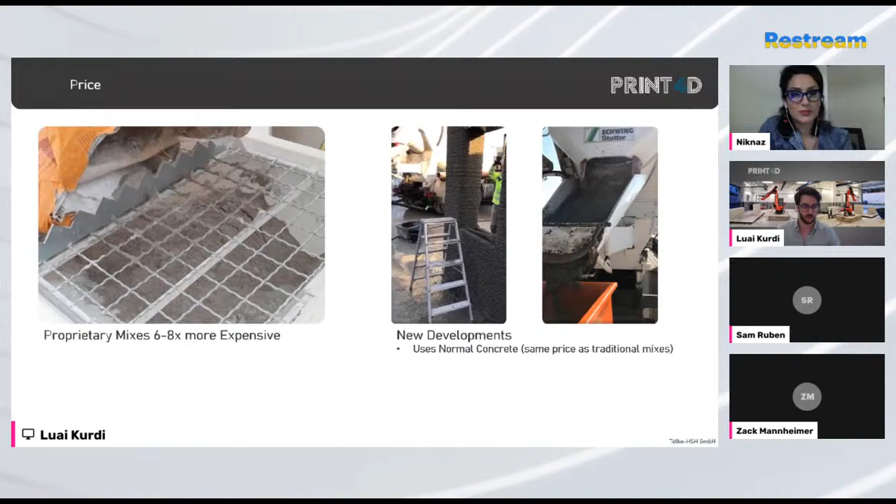You would need to use some additives to make it printable, but still, with this approach, you're able to reach 1 to 1.5 times the price of the normal concrete mix. In terms of time and speed, the old or traditional methods are obviously much slower. You have to build one block at a time, as you can see in the photo, with a large construction team, and there's big room for human error. However, with robotic 3D concrete printing, you are 6 times faster than traditional concrete methods.

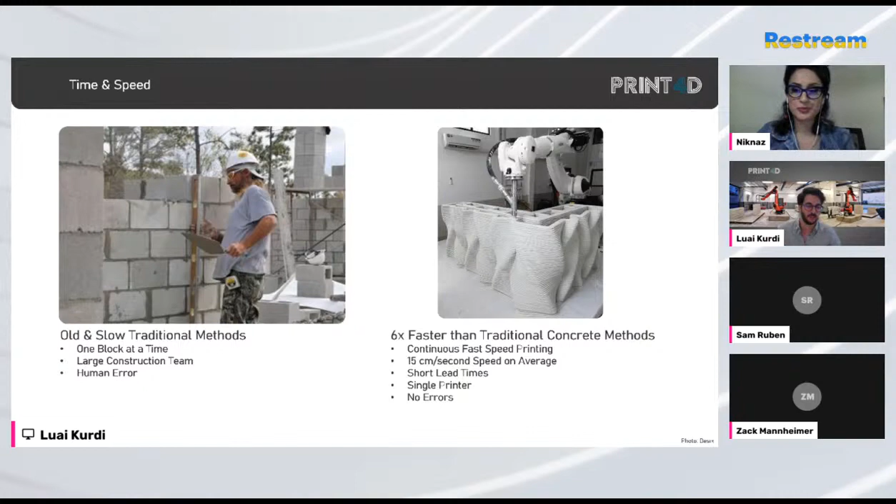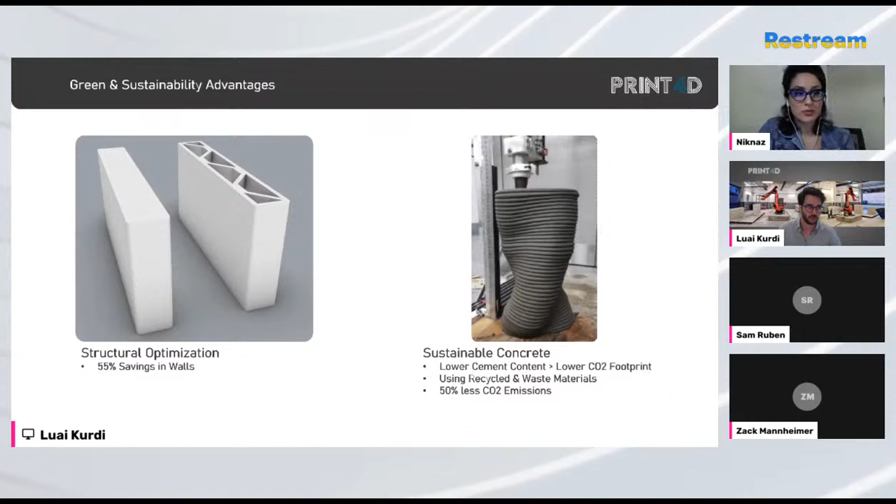In addition, we're trying to develop the concrete mix itself, developing lower cement mixes that help lower CO2 emissions. We're also introducing recycled and waste materials that will ultimately help reduce 50% of CO2 emissions. Combining those two approaches, we're able to reduce the CO2 emissions associated with concrete manufacturing by up to 75%. This is very exciting news, and we're happy to be part of it.

Great, thank you so much, Luai. We are getting close on time, so I'll just wrap up. Oh sure, I'll just wrap up.

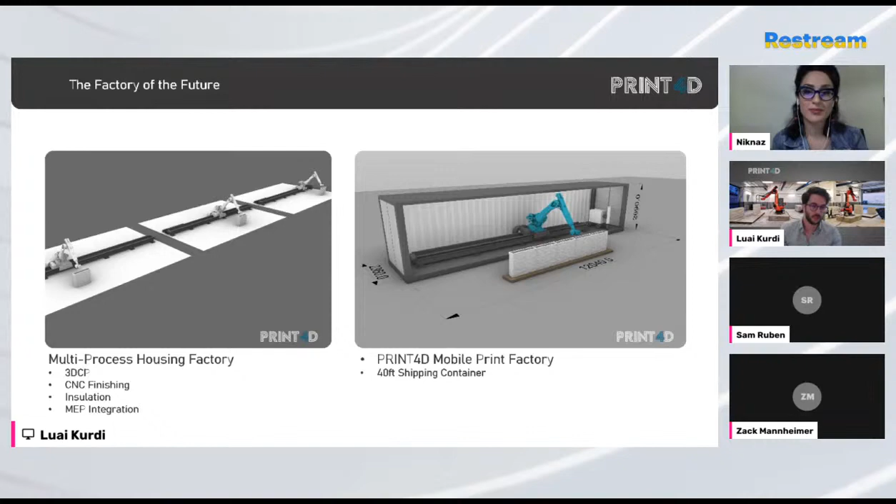Thank you so much, and sorry for being too long. Wonderful, no worries, thank you. Love the presentation, very informative. Beautiful projects, beautiful designs, sophisticated construction. It's fascinating how you're all working on these exciting projects, all in different climate zones.